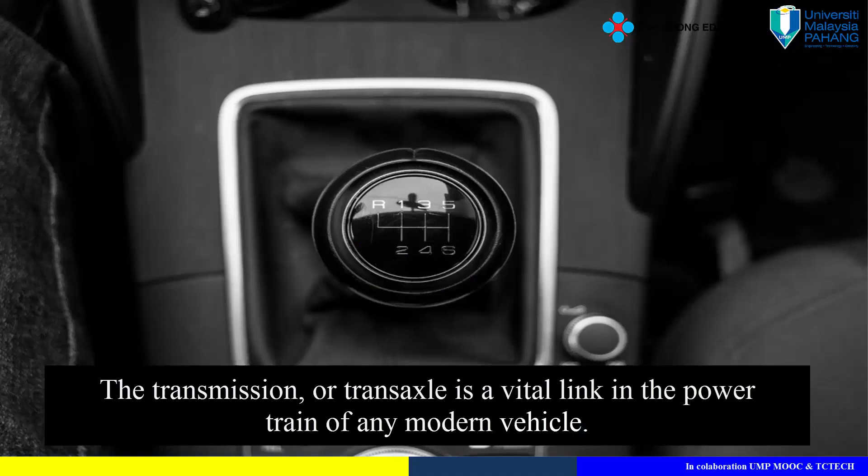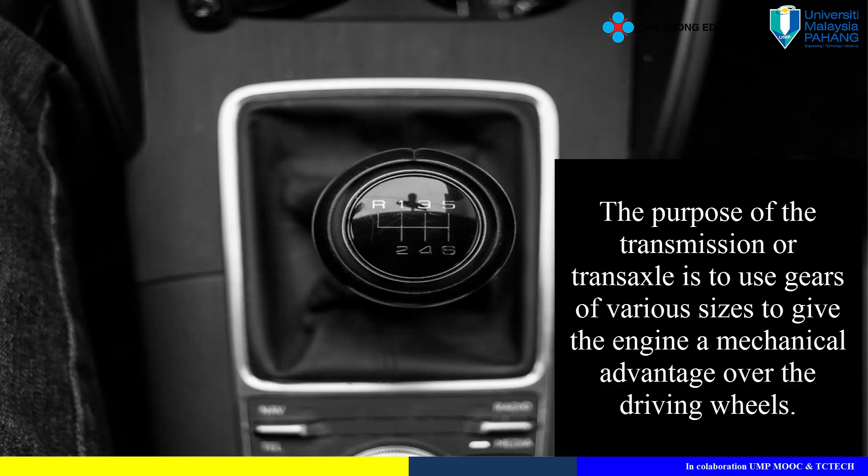Manual transmission and transaxle. The transmission, or transaxle, is a vital link in the powertrain of any modern vehicle. Its purpose is to use gears of various sizes to give the engine a mechanical advantage over the driving wheels.

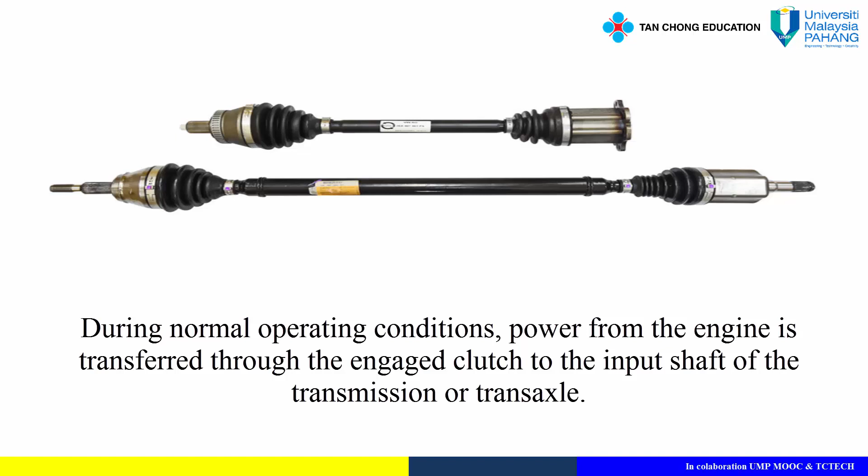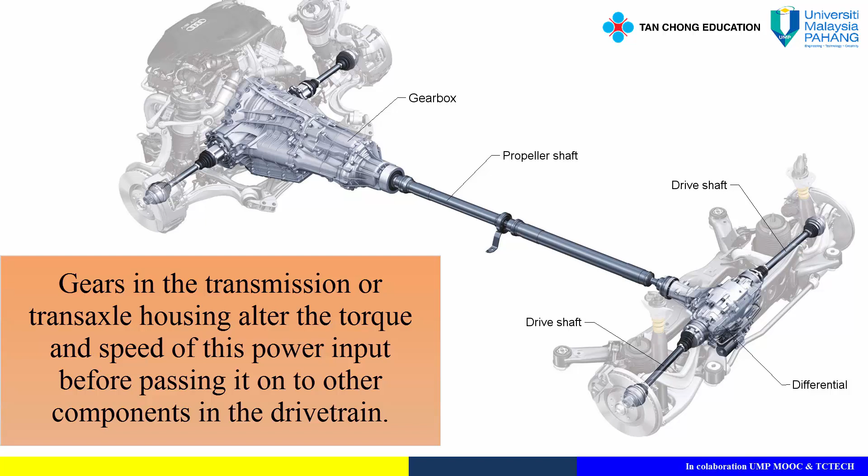During normal operating conditions, power from the engine is transferred through the engaged clutch to the input shaft of the transmission, or transaxle. Gears in the transmission, or transaxle, housing alter the torque and speed of this power input before passing it on to other components in the drivetrain.

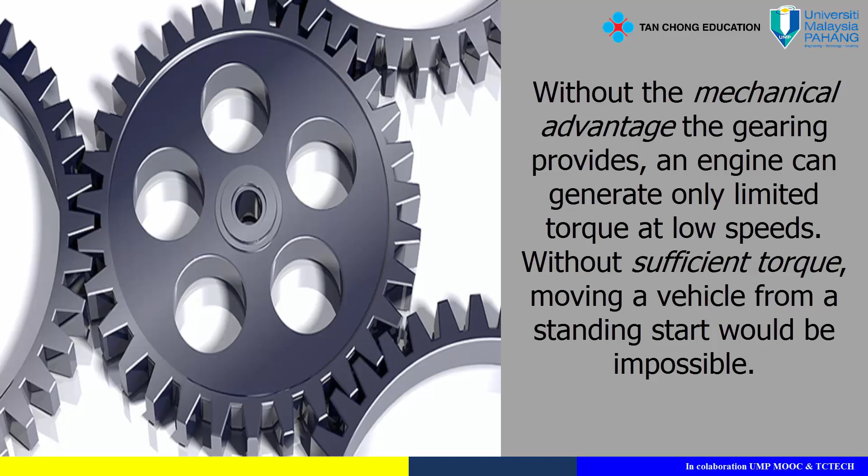Without the mechanical advantage the gearing provides, an engine can generate only limited torque at low speeds. Without sufficient torque, moving a vehicle from a standing start would be impossible.

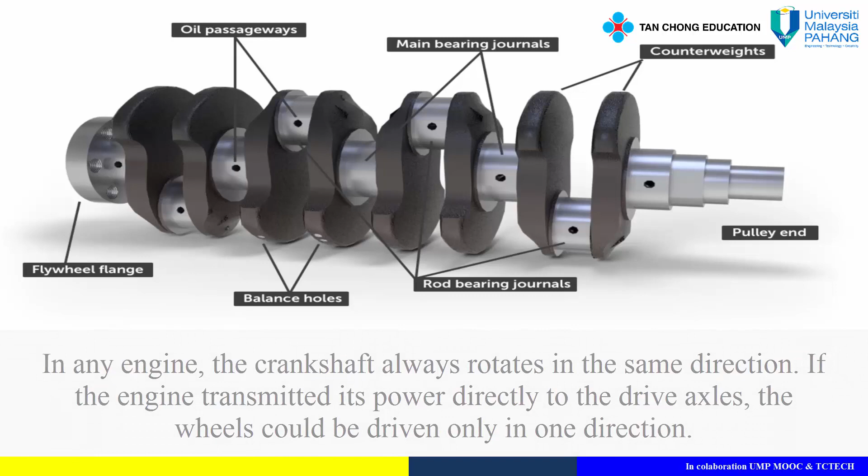In any engine, the crankshaft always rotates in the same direction. If the engine transmitted its power directly to the drive axles, the wheels could be driven only in one direction. Instead, the transmission, or transaxle, provides the gearing needed to reverse direction, so the vehicle can be driven backward. There is also a neutral position that stops engine rotation and power from reaching the drive wheels.

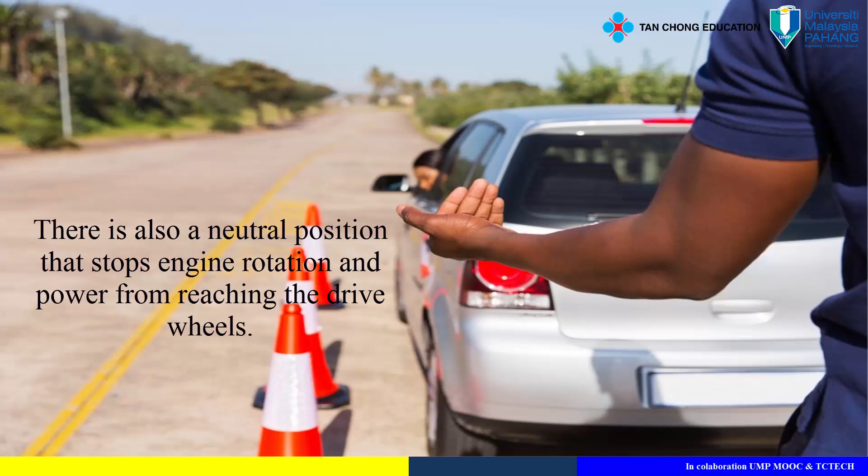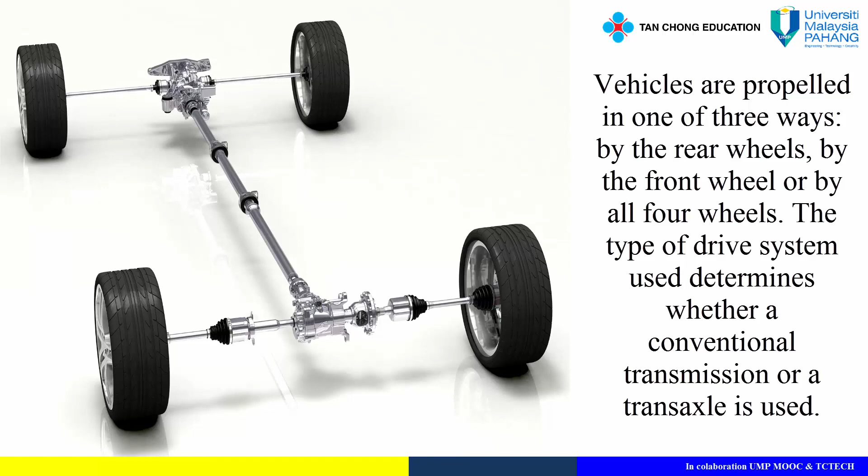Transmission versus transaxle. Vehicles are propelled in one of three ways: by the rear wheels, by the front wheels, or by all four wheels. The type of drive system used determines whether a conventional transmission or a transaxle is used.

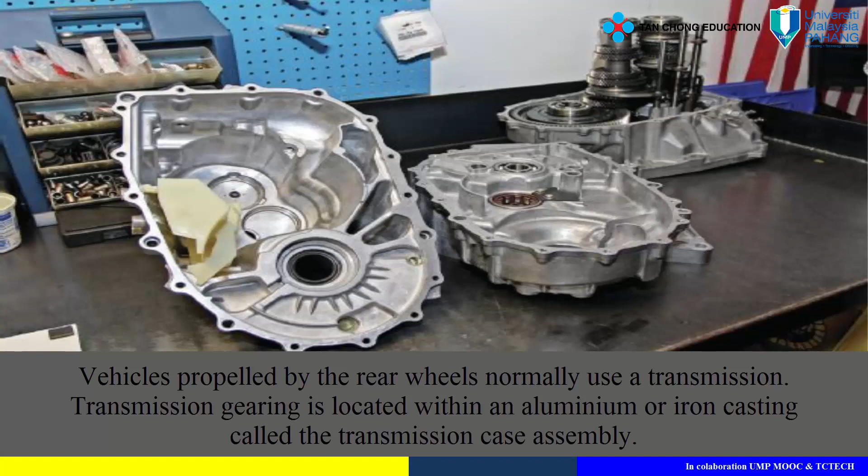Vehicles propelled by the rear wheels normally use a transmission. Transmission gearing is located within an aluminium or iron casting called the transmission case assembly. The transmission case assembly is attached to the rear of the engine, which is normally located in the front of the vehicle.

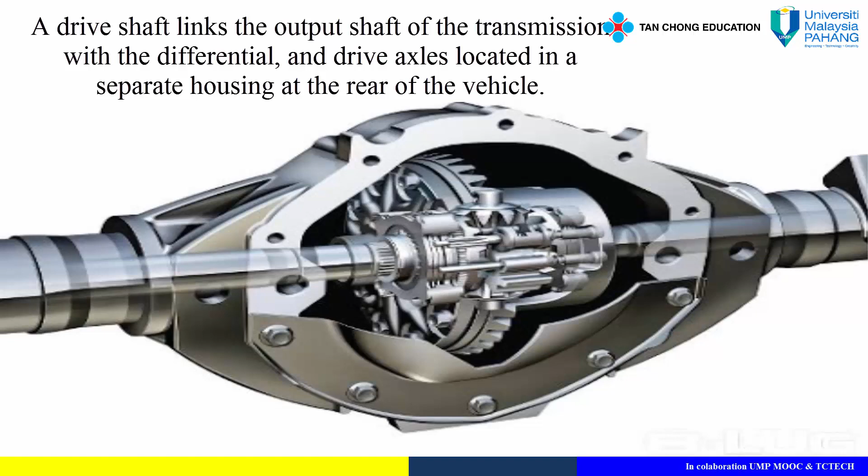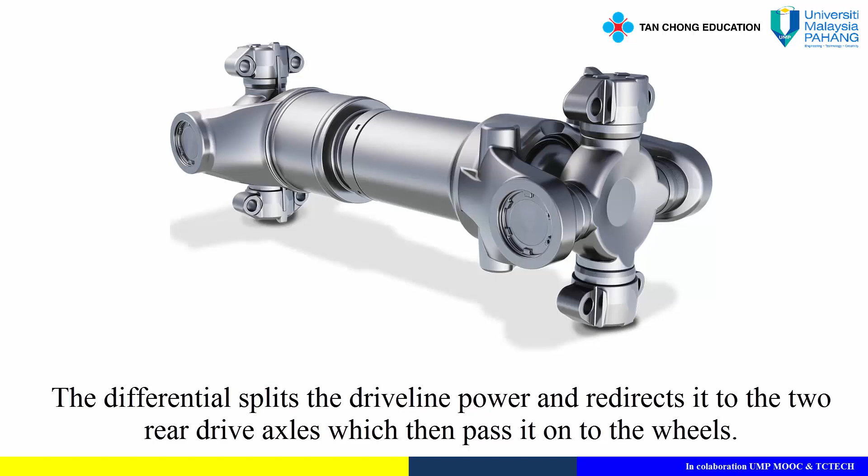A drive shaft links the output shaft of the transmission with the differential and drive axles located in a separate housing at the rear of the vehicle. The differential splits the driveline power and redirects it to the two rear drive axles, which then pass it on to the wheels. For many years, rear-wheel drive systems were the conventional method of propelling a vehicle.

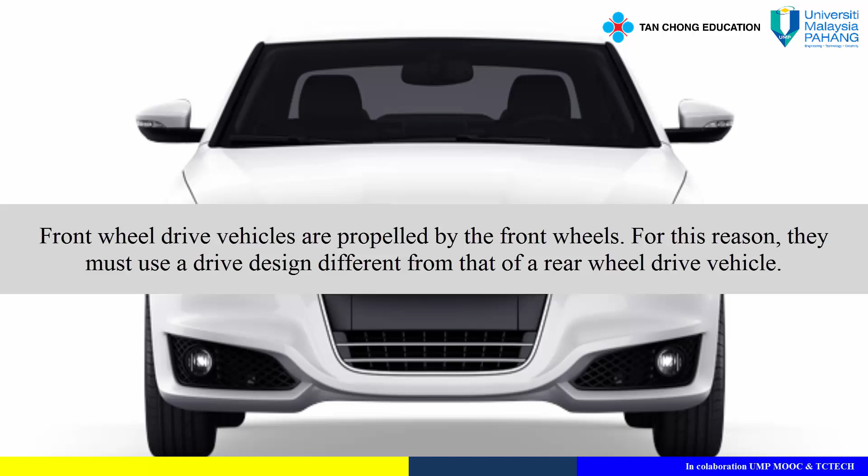Front-wheel drive vehicles are propelled by the front wheels. For this reason, they must use a drive design different from that of a rear-wheel drive vehicle. The transaxle is the special power transfer unit commonly used on front-wheel drive vehicles.

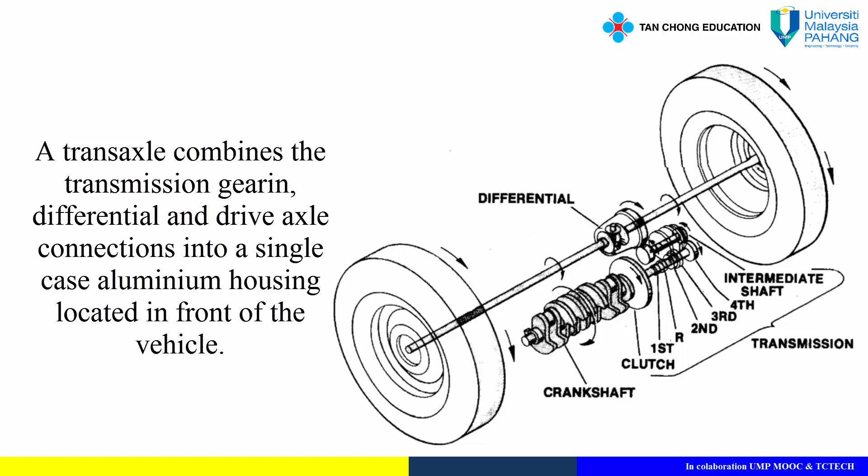A transaxle combines the transmission gearing, differential, and drive axle connections into a single case aluminium housing, located in front of the vehicle. This design offers many advantages.

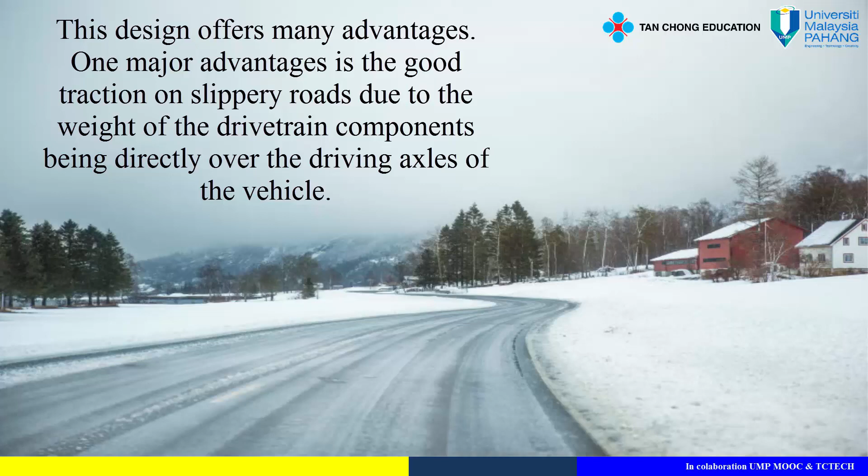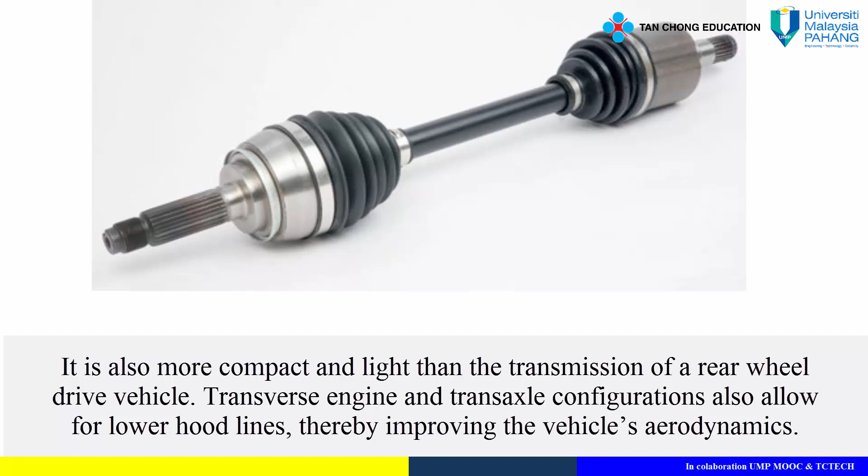One major advantage is good traction on slippery roads, due to the weight of the drivetrain components being directly over the driving axles of the vehicle. It is also more compact and light than the transmission of a rear-wheel drive vehicle. Transverse engine and transaxle configurations also allow for lower hood lines, thereby improving the vehicle's aerodynamics.

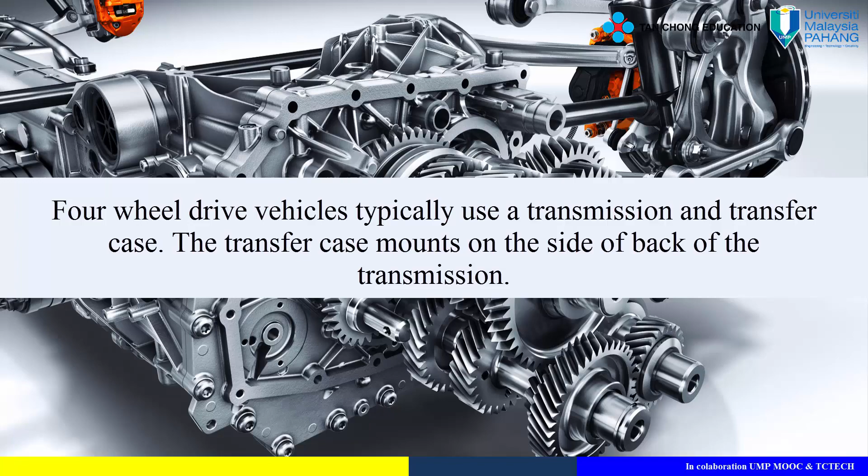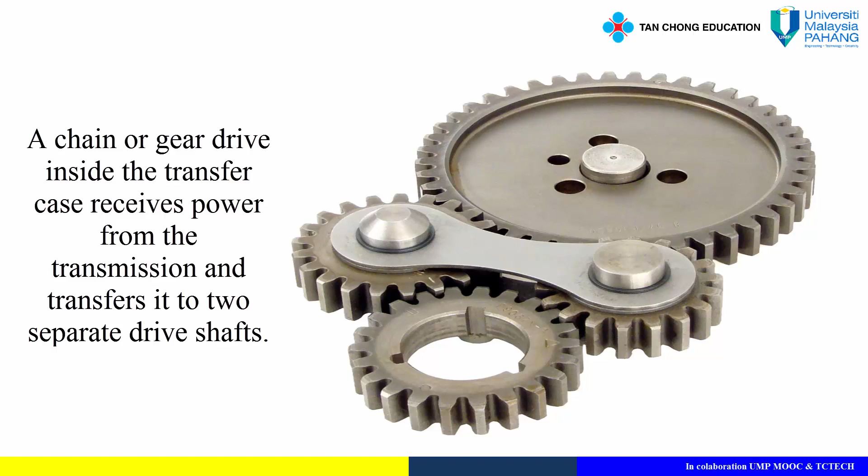Four-wheel drive vehicles typically use a transmission and transfer case. The transfer case mounts on the side and back of the transmission. A chain or gear drive inside the transfer case receives power from the transmission and transfers it to two separate drive shafts.

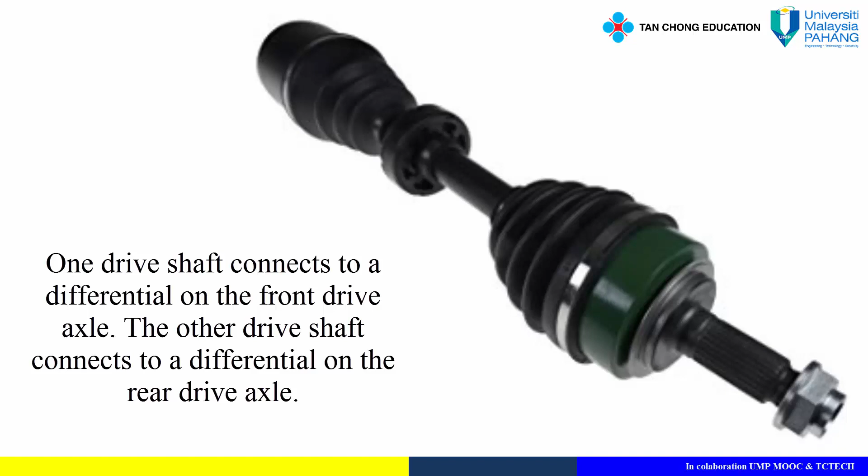One drive shaft connects to a differential on the front drive axle. The other drive shaft connects to a differential on the rear drive axle.

Most manual transmissions and transaxles are constant mesh, fully synchronized units. Constant mesh means that whether or not the gear is locked to the output shaft, it is in mesh with its counter gear. All gears rotate in the transmission, as long as the clutch is engaged.

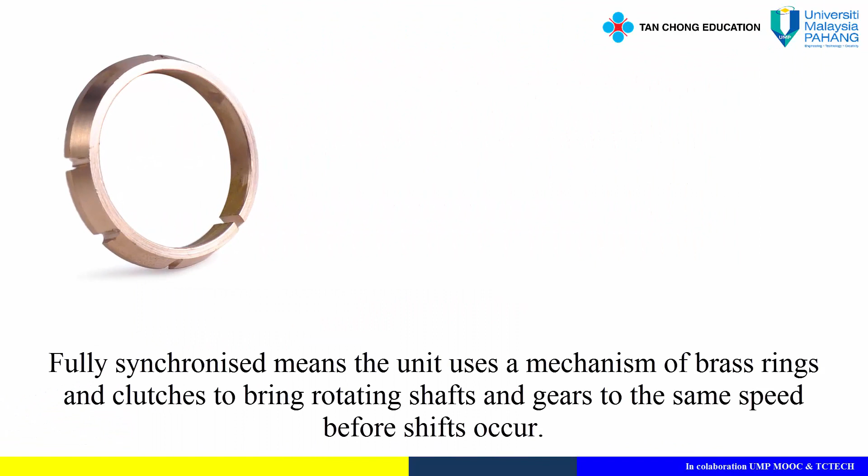Fully synchronized means the unit uses a mechanism of brass rings and clutches to bring rotating shafts and gears to the same speed before shifts occur. This promotes smooth shifting. In a vehicle equipped with a 4-speed manual shift transmission or transaxle, all 4 forward gears are synchronized.

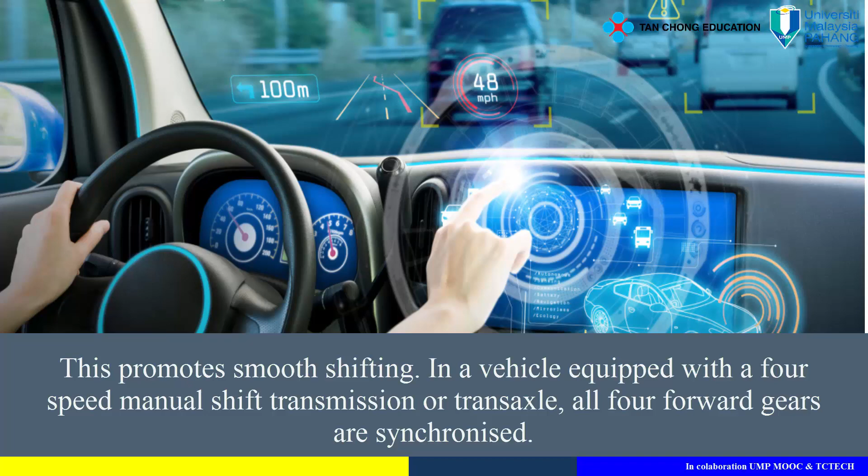Reverse gearing may or may not be synchronized, depending on the type of transmission or transaxle.

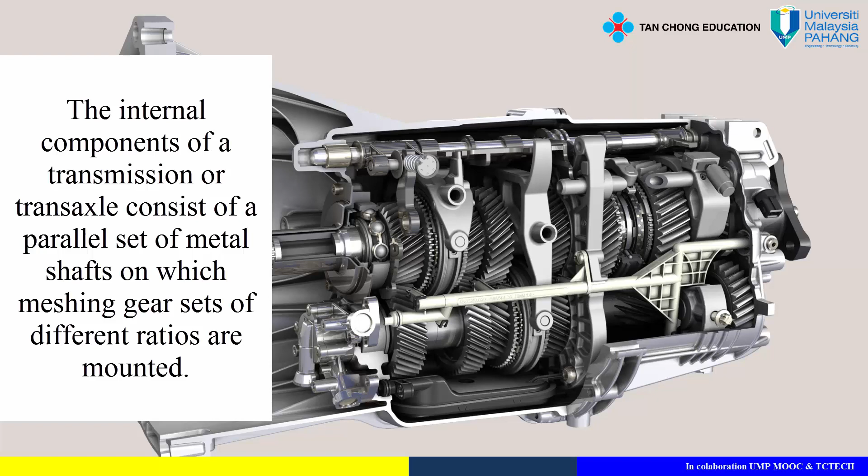Transmission or transaxle design. The internal components of a transmission, or transaxle, consist of a parallel set of metal shafts, on which meshing gear sets of different ratios are mounted.

By moving the shift lever, gear ratios can be selected to generate different amounts of output torque and speed. The gears are mounted or fixed to the shafts in a number of ways.

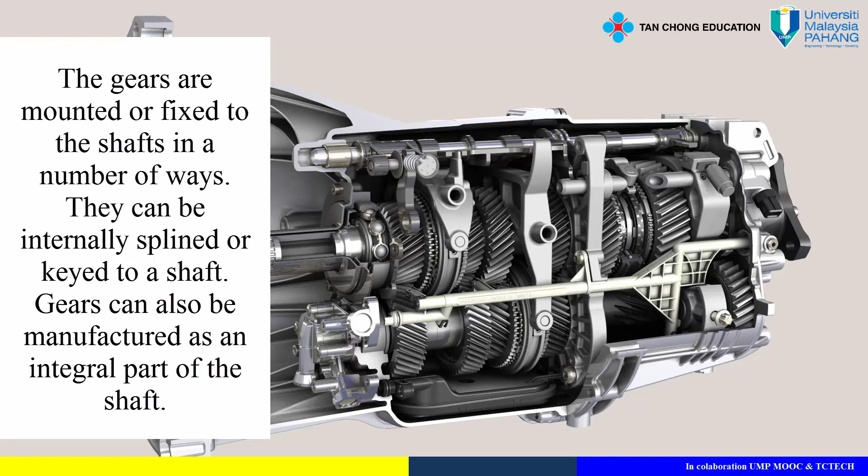They can be internally splined or keyed to a shaft. Gears can also be manufactured as an integral part of the shaft. Gears that must be able to freewheel around the shaft during certain speed ranges are mounted to the shaft using bushings or bearings.

The shafts and gears are contained in a transmission or transaxle case or housing. The components of this housing include the main case body, side or top cover plates, extension housings, and bearing retainers. The metal components are bolted together with gaskets providing a leak-proof seal at all joints. The case is filled with transmission fluid to provide constant lubrication and cooling for the spinning gears and shafts.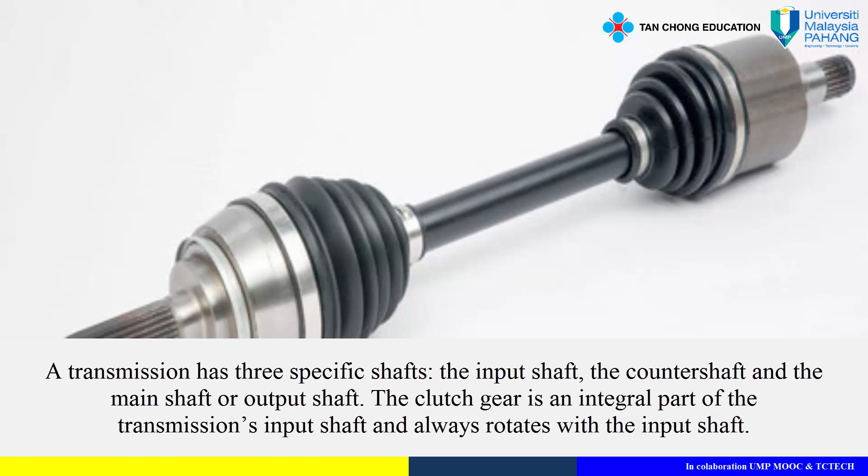Transmission features. Although they operate in a similar fashion, the layout, components, and terminology used in transmission and transaxle are not exactly the same. A transmission has three specific shafts: the input shaft, the counter shaft, and the main shaft, or output shaft. The clutch gear is an integral part of the transmission's input shaft, and always rotates with the input shaft. The counter shaft is actually several gears machined out of a single piece of steel.

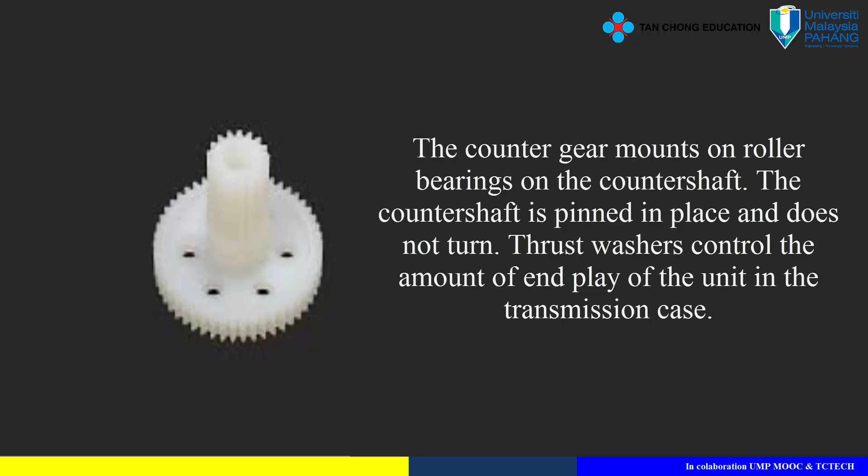The counter shaft may also be called the counter gear, or cluster gear. The counter gear mounts on roller bearings on the counter shaft. The counter shaft is pinned in place, and does not turn. Thrust washers control the amount of end play of the unit in the transmission case.

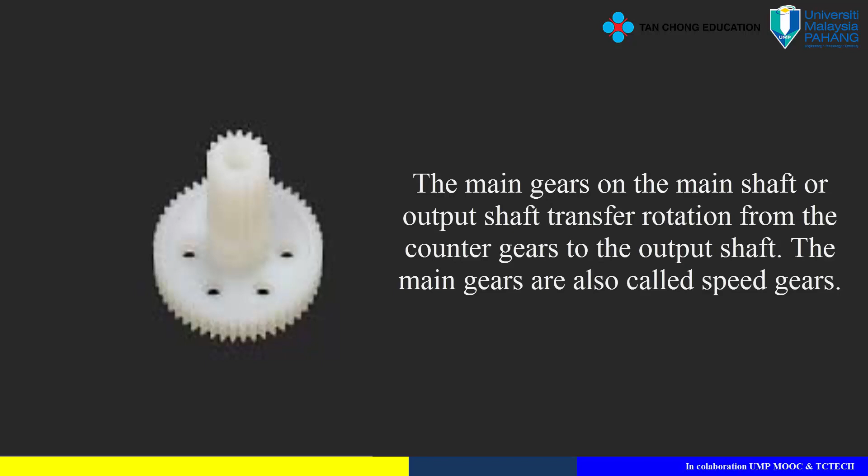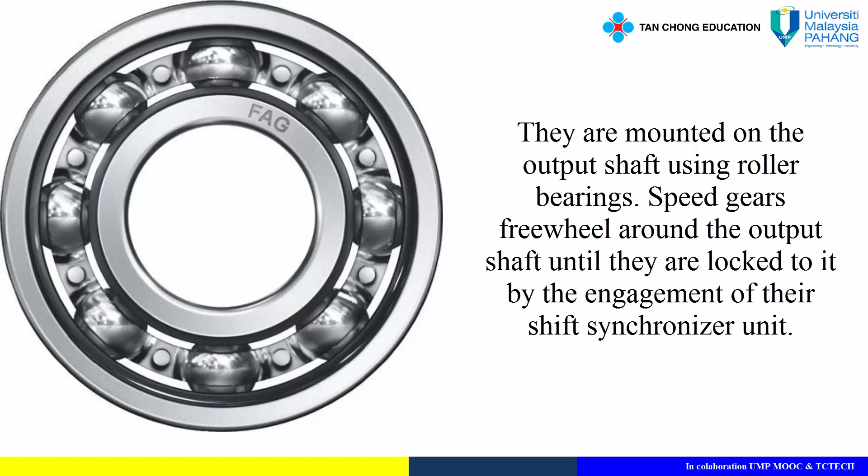The main gears on the main shaft, or output shaft, transfer rotation from the counter gears to the output shaft. The main gears are also called speed gears. They are mounted on the output shaft using roller bearings. Speed gears freewheel around the output shaft until they are locked to it by the engagement of their shift synchronizer unit. Power flows from the transmission input shaft to the clutch gear.

The clutch gear meshes with the large counter gear of the counter gear cluster. This cluster gear is now rotating. Since the cluster gear is meshed with the speed gears on the main shaft, the speed gears are also turning.

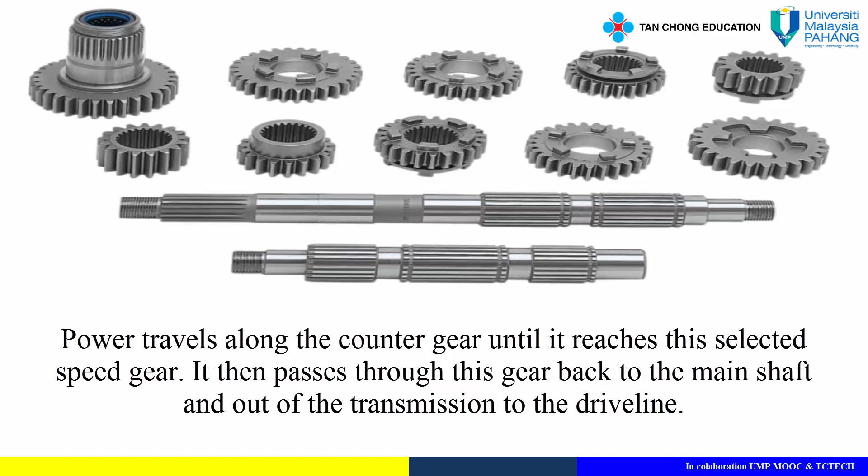There can be no power output until one of the speed gears is locked to the main shaft. This is done by activating a shift fork, which moves its synchronizer to engage the selected speed gear to the main shaft. Power travels along the counter gear until it reaches this selected speed gear. It then passes through this gear back to the main shaft, and out of the transmission to the drive line.

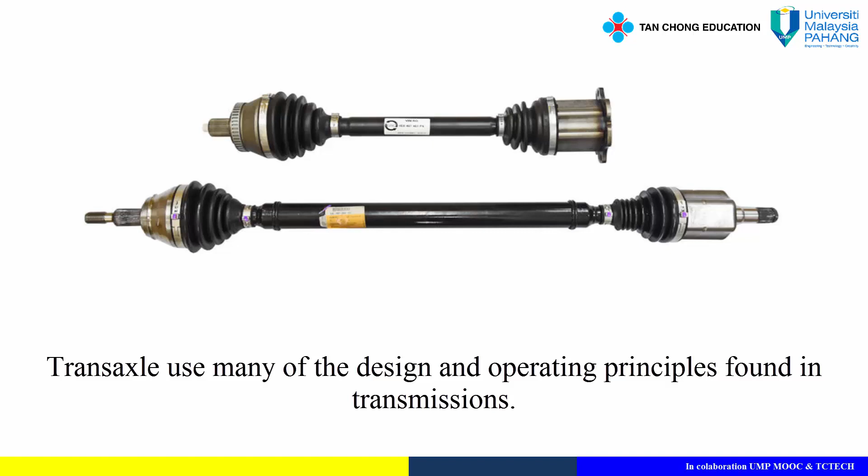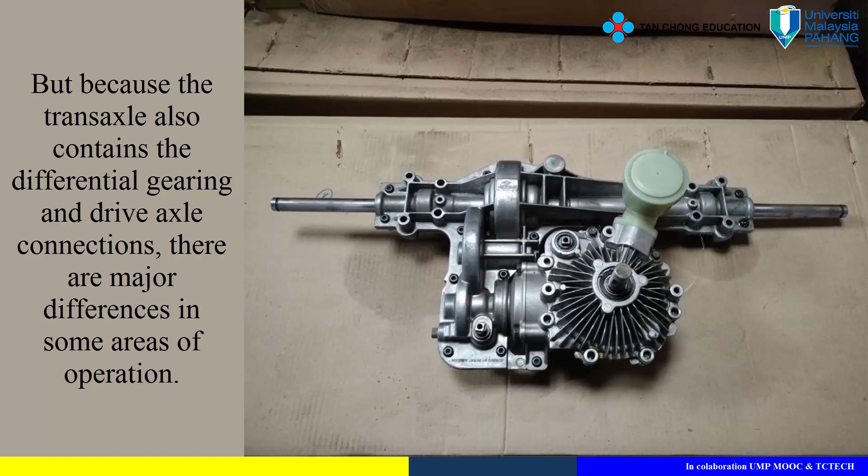Transaxle features. Transaxles use many of the design and operating principles found in transmissions. But because the transaxle also contains the differential gearing and drive axle connections, there are major differences in some areas of operation. Refer to this figure. This transaxle uses fully synchronized, constant mesh helical gears on all forward speeds, and spur gears for reverse.

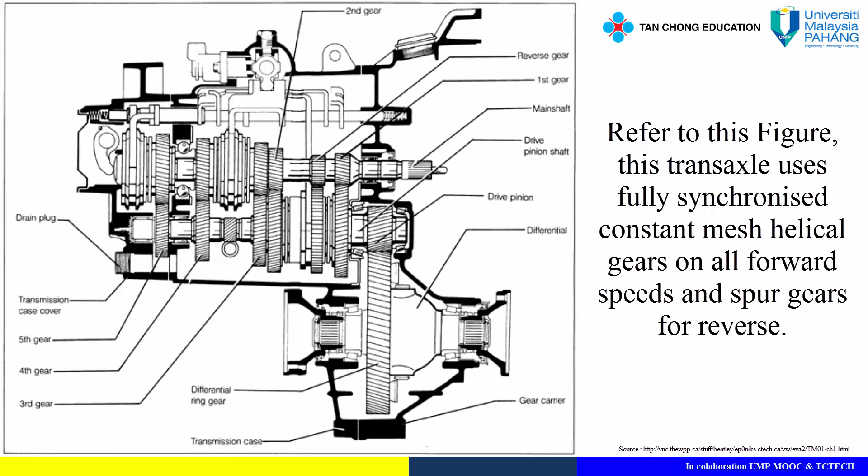A transaxle has two separate shafts, an input shaft, and an output shaft. The input shaft is the driving shaft. It is normally located above and parallel to the output shaft. The output shaft is the driven shaft.

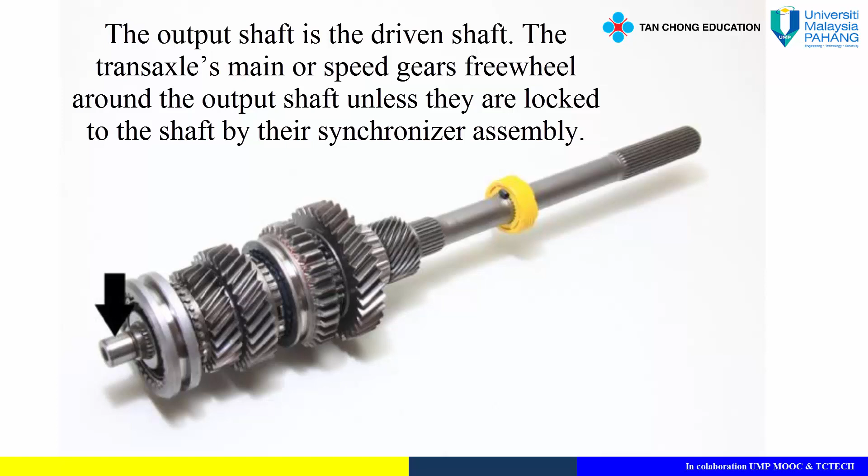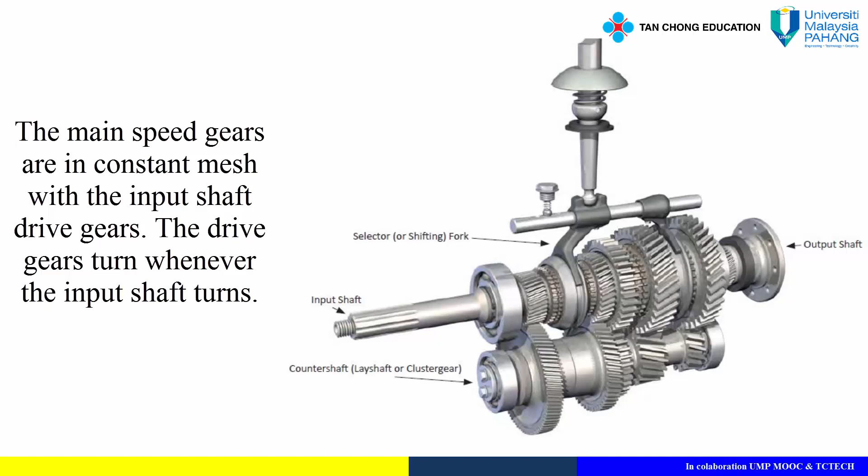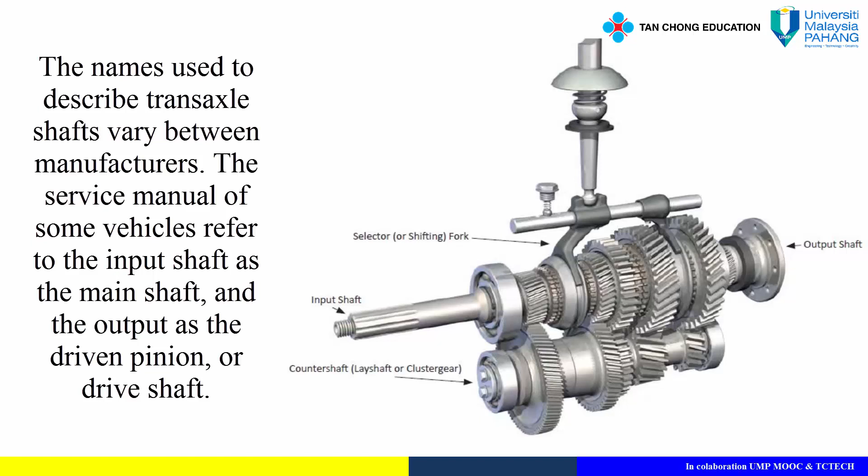The transaxle's main, or speed gears, freewheel around the output shaft unless they are locked to the shaft by their synchronizer assembly. The main speed gears are in constant mesh with the input shaft drive gears. The drive gears turn whenever the input shaft turns. The names used to describe transaxle shafts vary between manufacturers. The service manual of some vehicles refer to the input shaft as the main shaft, and the output as the driven pinion, or drive shaft. Others call the input shaft and its gears the input gear cluster, and refer to the output shaft as the main shaft.

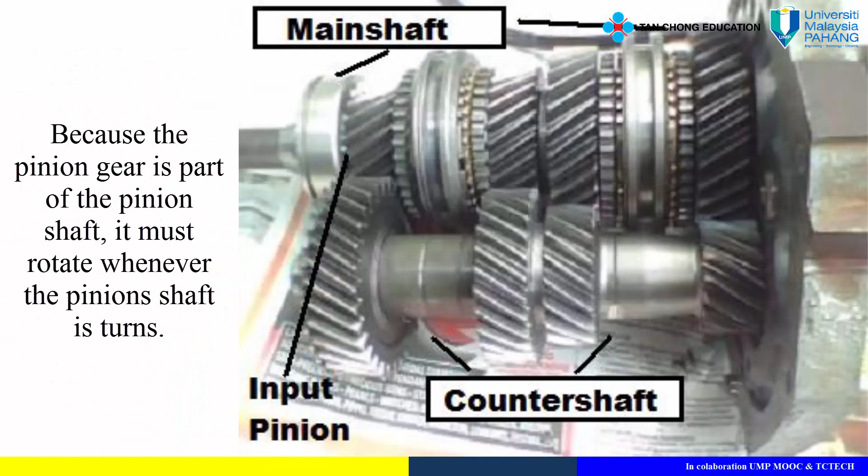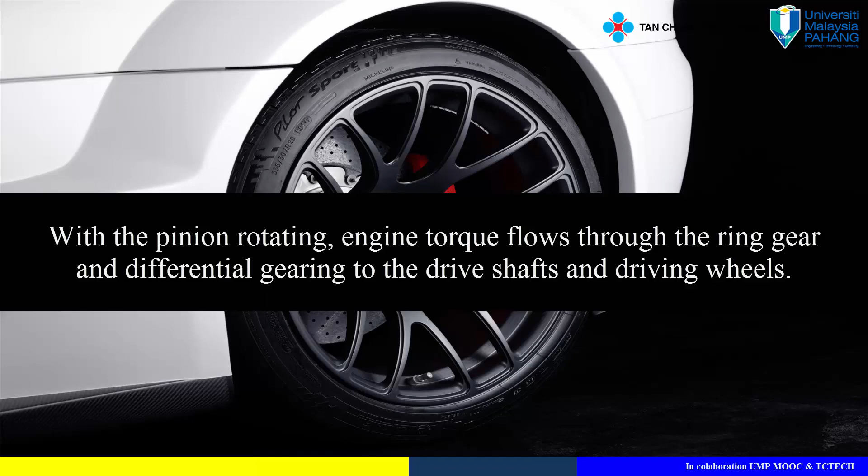A pinion gear is machined onto the end of the transaxle's pinion shaft. This pinion gear is in constant mesh with the differential ring gear located in the lower portion of the transaxle housing. Because the pinion gear is part of the pinion shaft, it must rotate whenever the pinion shaft turns. With the pinion rotating, engine torque flows through the ring gear, and differential gearing to the drive shafts and driving wheels.

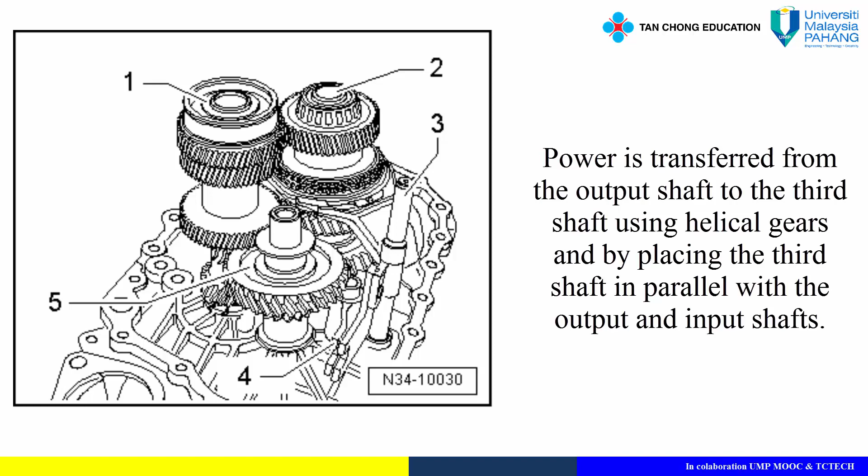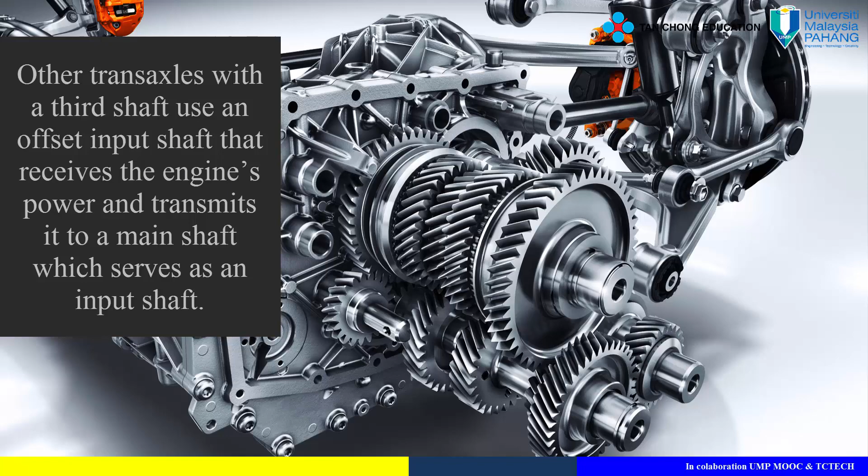Some transaxles have a third shaft designed to offset the power flow on the output shaft. Power is transferred from the output shaft to the third shaft using helical gears, and by placing the third shaft in parallel with the output and input shafts. Other transaxles with a third shaft use an offset input shaft that receives the engine's power and transmits it to a main shaft, which serves as an input shaft. The third shaft is only added to transaxles when an extremely compact transaxle is required.